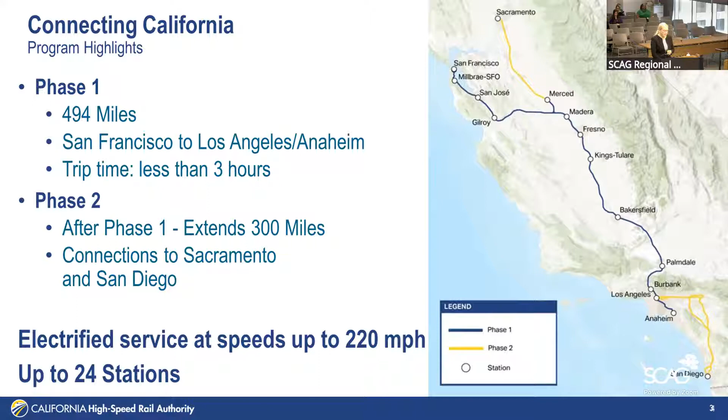I'll jump ahead of some of the questions. If you hear we haven't laid track, that is true, because that's the last thing you lay — when you have your entire guideway, you purchase the track and lay it all in at once. We're doing advanced design to connect Bakersfield with Merced.

That's the 171 miles that we feel will be our initial operating segment. We've environmentally cleared San Francisco to Los Angeles — 463 miles has been environmentally cleared — and we're advancing what we refer to as the bookends.

Proposition 1A set aside some funds for Northern California, where we've worked with Caltrain to electrify their corridor. They put it in place and saw a substantial increase in ridership there. In Southern California, I don't think I have a slide on this, but we invested with Metro $70 million in Rosecrans Marquardt in Santa Fe Springs, which I believe is substantially complete. It's open and operating, so we're proud to partner with Metro on that, as well as on Union Station.

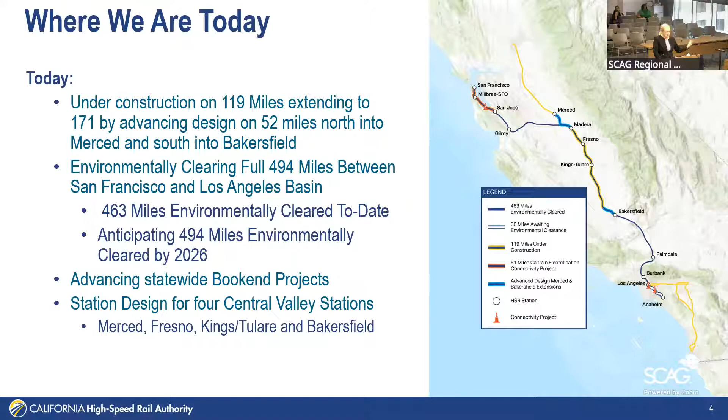We are working with Metro now on improvements on Union Station to make that an overpass there. We're designing stations in the Central Valley in phases, to be installed in phases, so that as our ridership grows, we will grow with it at our station areas. We're under new leadership, under CEO Ian Choudri.

He's bringing more of the private sector thought process into the planning that we're doing. So he set out some goals to build smarter, faster, and more economical, in more phases than maybe what we had thought we would do initially in the Central Valley. Basically, we're trying to make our dollars go further and provide for more riders. It may not initially be the high speeds, but it allows us to phase in that service and provide more service to everyone by taking a different approach.

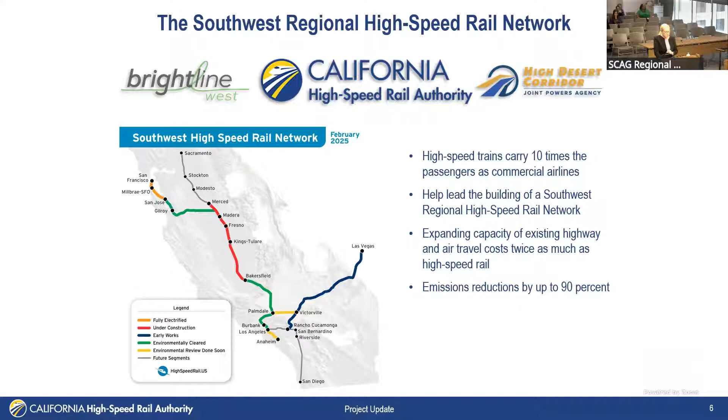We partner with Brightline West, who you're going to hear from also, and the High Desert Corridor. You can see on this map how interconnected we will all be. This will be a Southwest regional high-speed rail network connecting San Francisco, and ultimately our vision is Las Vegas and Southern California.

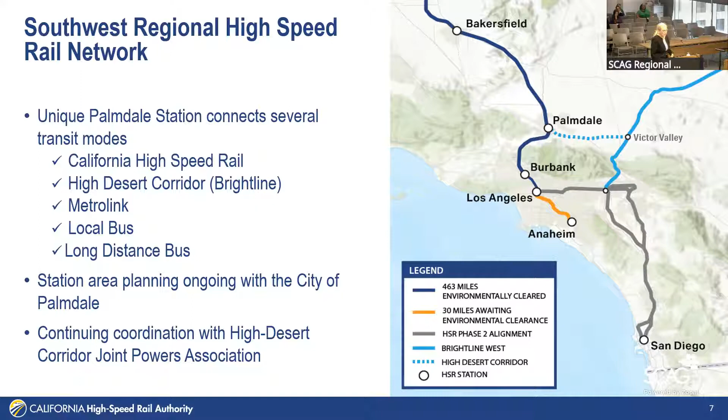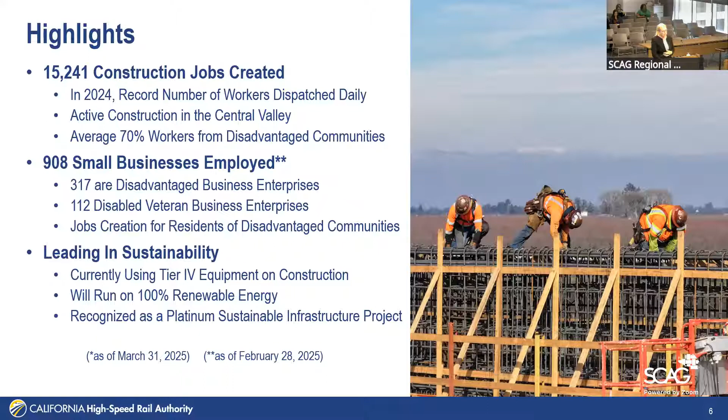Since we started work, we've created over 15,000 construction jobs. We have a very aggressive small business engagement program, so we're always looking for ways to engage more with small businesses. In fact, most of our employees come from the communities in the Central Valley. We're an important provider of jobs in that area for both small businesses and employees. And we're leading on sustainability, trying to make our operation as sustainable as possible, with a commitment to use all renewable electric energy for our operations.

And that was, if you saw any news yesterday, you probably saw it. Secretary Duffy is taking a look at this grant. We disagree with the fact that he says we're not done yet. And as I said, of course, we haven't laid rail because we haven't finished all the guideways. I'm just going to address that question now because I know somebody's going to have it. But we do have 30 days to respond, and we disagree with their assessment of the progress we've made.

We started in the Central Valley. We're doing what we can with the funding that was initially allocated, and we're trying to figure out ways to really stretch that dollar and make our previous investment more productive. So we will be working with the administration, but we disagree with what they have to say. We have a project update report coming out in July, which will provide additional information on schedule and approach.

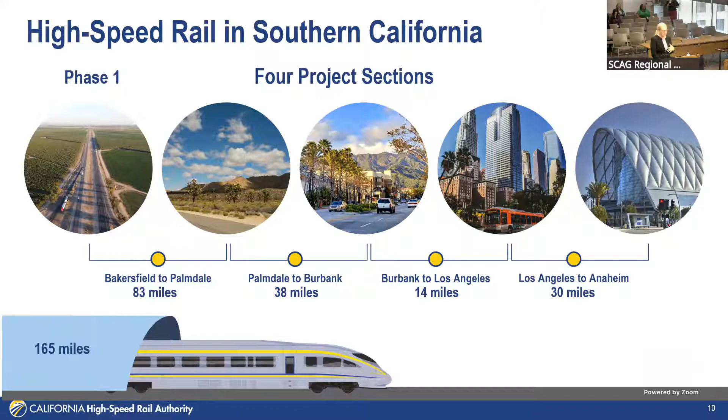Moving more to Southern California, where I oversee what's happening. We're divided for environmental work into four project sections: Bakersfield to Los Angeles, environmentally complete, and then we're deep diving today into Los Angeles to Anaheim. Just a highlight: Bakersfield to Palmdale was environmentally cleared in 2022, and Palmdale to Burbank was environmentally cleared in 2024. We are looking for funding for that Bakersfield to Palmdale work so that we can connect into Palmdale, like I mentioned, into Brightline.

And then we've adopted a preferred alternative for our approach to Los Angeles to Anaheim. So I'm going to spend the rest of the time on Los Angeles to Anaheim, which is probably relevant to many of you. We have a preferred alternative, which we refer to as our shared passenger track alternative.

It's just south, for those of you who know BNSF's Hobart Yard, a little bit south of that yard, and a lot of that property we were planning to acquire anyway. It gives us kind of a double-ended operation.

We do not plan to have a high-speed rail stop or station in this corridor, at least not in our preferred alternative. We took a look at this and thought an additional platform would be a redundant cost and expense, given that Metrolink and Amtrak's LOSSAN all serve the same corridor. If one of our passengers really needs to connect with us, they can take a train to Union Station or take a train to ARTIC.

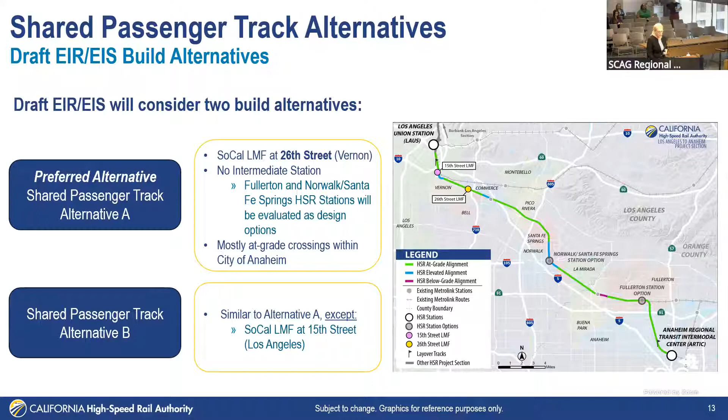We call it the shared passenger track alternative because this is a BNSF corridor. It's currently a 3-main track corridor, used by Metrolink, LOSSAN, and other passenger carriers currently. We're proposing to add one main track and allow this to be kind of a 2+2 operation.

As you can see in the graphic, two tracks will be dedicated freight and two tracks predominantly passenger. But from time to time, our modeling shows it's necessary to have freight potentially run under that catenary, and our modeling shows that we can allow this.

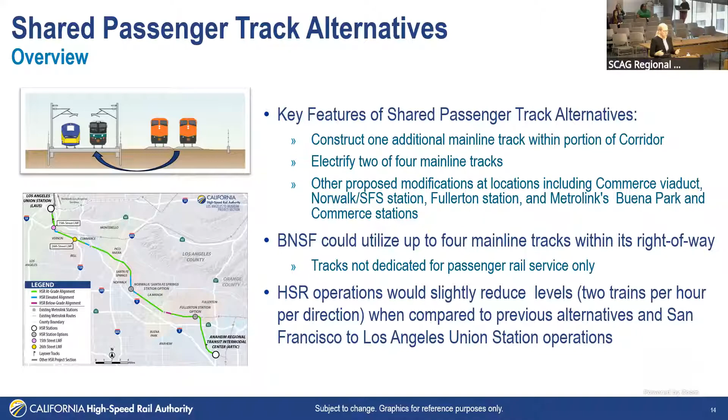What this system does is allow for directional traffic for rail operations. So all the freight trains are going the same direction on this track, the same direction on that track. It really opens up a more efficient corridor, allowing for our 2 trains per hour per direction, but also some potential growth in the future for the other passenger carriers that serve that corridor.

Real quick, I'll run through these. I've got a graphic that shows some of the improvements we're making throughout the corridor, and we're going to deep dive into the Commerce area, where we will have a flyover.

Currently, when BNSF needs to go into their facility in Commerce, shown here in green, the freight tracks, shown in orange, actually have to cross over the passenger tracks. What we want to do is a flyover or some sort of viaduct, whatever you want to call the bridge, so that BNSF can serve underneath their yard without that conflict. That's one way we will be creating additional capacity in the corridor.

We'll have to relocate that Commerce station that's currently there, just about a mile further to the east.

Back to the main corridor, taking a dive into the central part of the corridor. You can see BNSF has some facilities on the south side in green. So we're going to move BNSF back to the south side of that corridor with a flyover or viaduct in the Norwalk Santa Fe Springs area.

And then down on the bottom right is the Fullerton Airport. So in order to take our catenary out of the air pathway, we will be down in a trench going back under the BNSF tracks within that corridor. And as we go into the Fullerton area, passenger trains will be on the south side of the corridor so that they can serve into ARTIC and further south without that conflict with freight rail.

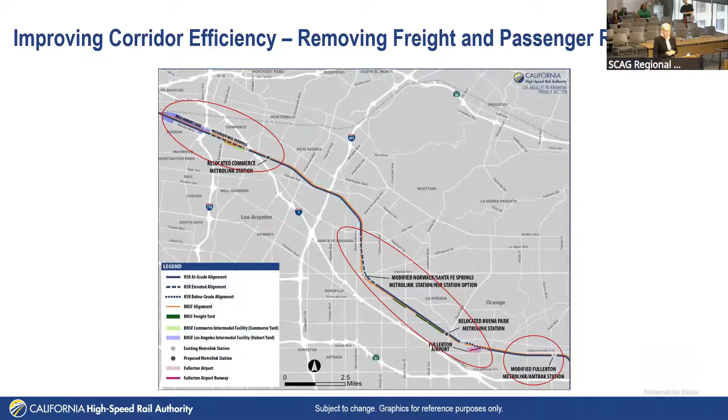I mentioned a light maintenance facility. It's just like the word sounds. It's light maintenance - we're not going to do heavy maintenance at this particular location, but it will be a place where we can inspect our equipment and do minor service and restocking of the equipment at that facility.

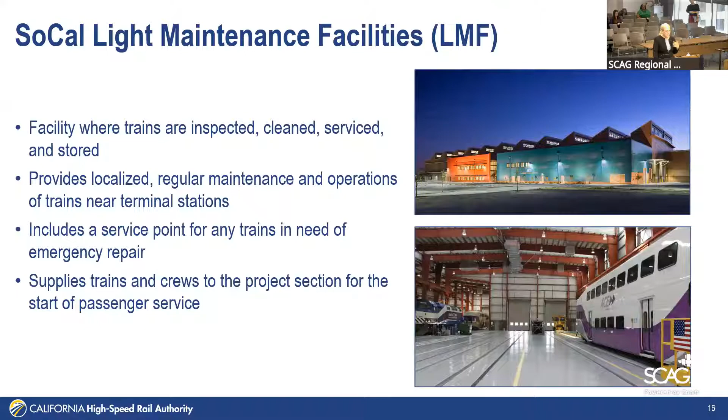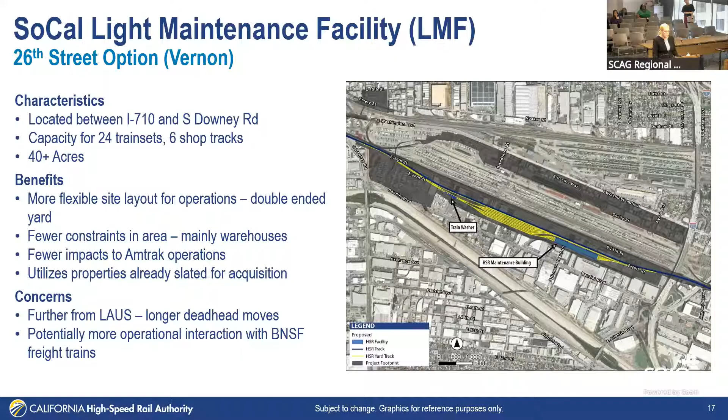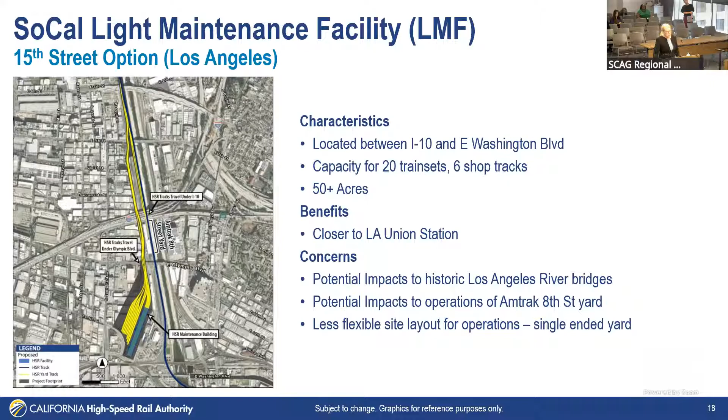So this is the location that we would put the light maintenance facility. Light maintenance facility option at 15th Street - you can see these are dead end tracks, which operationally is harder for trains to do. So it is not our preferred alternative, but we wanted to take a look at options.

Grade separations: the corridor between Union Station and Fullerton will be for us grade separated, which means that traffic going across, cars don't have to stop for our trains.

We will be grade separating that corridor, the one with the 4 main tracks. When we turn south to go toward ARTIC, it's a 2-track system. There aren't very many freight trains on that.

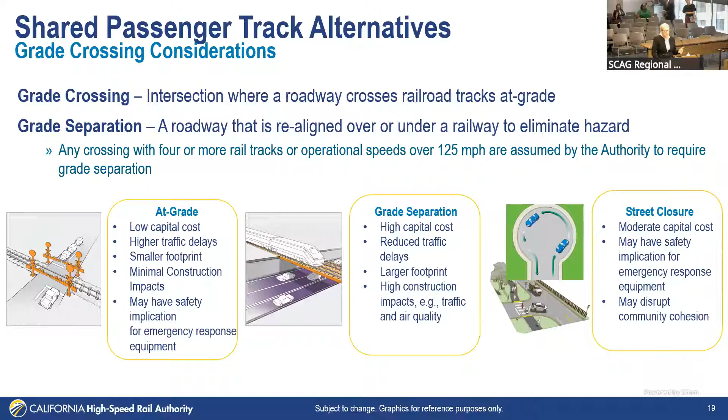So we're planning to leave that system pretty much as it is. That would be in the city of Anaheim. We've been working with Anaheim, but we felt that grade separating was going to create more disruption than was needed for our 2 trains per hour per direction. They'll be pretty quick trains, not long freight trains. So we're leaving that pretty much as is, with the exception of a couple crossings that we needed for our infrastructure.

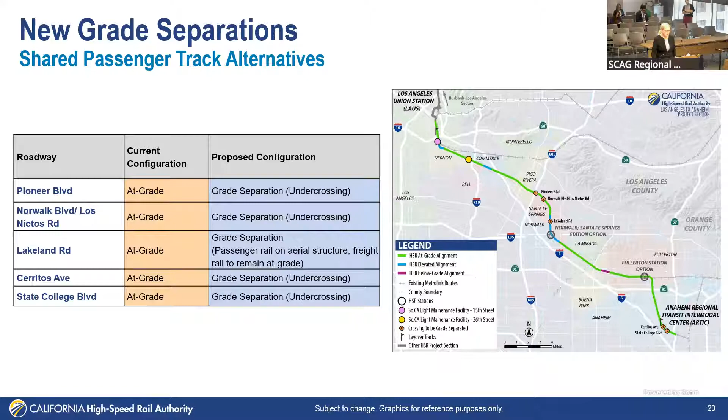As we get toward ARTIC, the Anaheim Transit Center down here at the bottom, we're going to put some layover tracks so that we can get our trains out of the way of everybody else. That will necessitate some improvements of grade separations there. But for the most part, we don't have plans to grade separate that corridor.

Where are we? Major milestones for LA to Anaheim. This is the last section that we have environmental to do. Our draft is coming out later this year. We're currently trending toward late October, possibly early November, but we will get it out one way or another this year. We'll be looking for folks to comment on that, and then we'll hopefully have our final environmental document out sometime spring, I would say mid 2026, and then to our board for a final determination later that year. That's it for me, and I wanted to leave time for questions, so I apologize for talking fast.

All right, Supervisor Spiegel had a hand up.

All right, I have a quick video, I think it will play.

Introducing Brightline West, America's first true high-speed train that's ushering in a new era of modern travel. From the lights of Las Vegas to the beaches of Southern California, Brightline West will connect two of the world's most iconic destinations in just 2 hours.

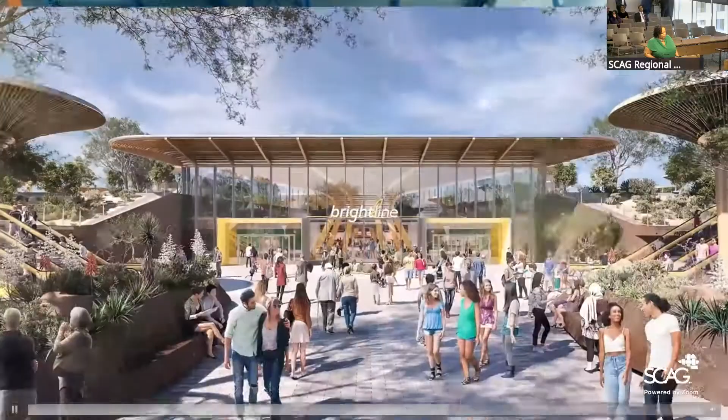By soaring at 200 miles per hour, Brightline's zero-emission, all-electric trains will be the greenest form of transportation in the world, and will be made right here in the USA with American labor. From beautiful stations with bright lounges and premium amenities, to an exceptional onboard experience with all the extras, Brightline West will offer a convenient and comfortable way to work, relax, and play.

Welcome to the ride reimagined. Welcome to Brightline West.

Introducing Brightline. Everybody says they won't be before you long, and then they do the opposite. But our goal at our company is to connect city pairs that are too long to drive and too short to fly. I grew up in Las Vegas, so I've gone back and forth to California my whole life. My mother lives in Orange County, and she wanted me to squeeze in a hug at the airport this morning. And I was like, Mom, there is no time. Got to get on the highway.

So our first passenger system, I got to ride this. I've ridden it several times, but in Florida, we started out with stations in Miami, Fort Lauderdale, and West Palm Beach. And then we did inline stations, which are smaller stations, in Aventura and Boca Raton. Those are similar to what we're going to be doing in Hesperia and Apple Valley. Then our flagship station launched in 2023 in Orlando, and we're actually in the Orlando airport, in Terminal C. So if you come in, you can connect there.

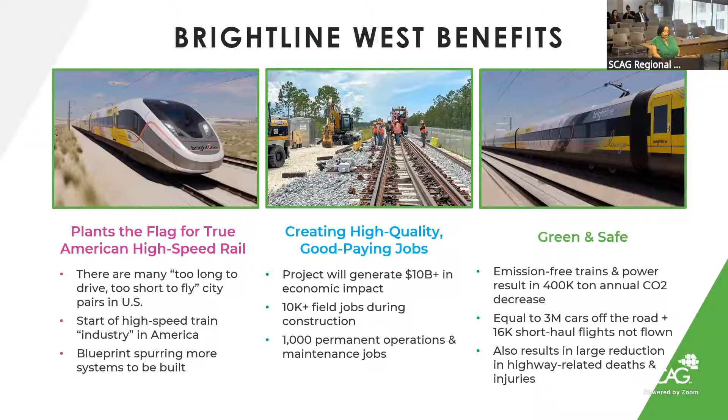So the track is mostly single track. There's about 37 miles of double track, which allows trains to pass each other. We will be going every hour on the hour, but we do have 4 areas, well 5, if you look at when we're coming out on Rancho, that will have double track, but it is mostly single track. And I learned this - I tell people, you know, transportation was not my background, but the way the trains are developed, the conductor would just go from the front of the train to the back of the train and keep going, so they don't turn around or anything.

Our contractor summary - so we're in the process of finalizing all of our contracts right now. Our office, every conference room is full every day as they're negotiating those terms, and you'll see things happening in the next few weeks. The contract with Siemens was signed in spring of 2024. Siemens, we also have a Buy America project, but we do have a Buy America waiver for the first set of trains, the first 2. They will be built in Germany. Our engineers, our union leaders have been going over there to learn how to build the train.

When they come back, we have a facility, Siemens has a facility in Horseheads, New York, upstate New York, which is very familiar since Siemens had a factory there previously. That's where our trains will be built. The four parts for the contractors are civil infrastructure, track and system, rolling stock which is Siemens, and then our other project costs.

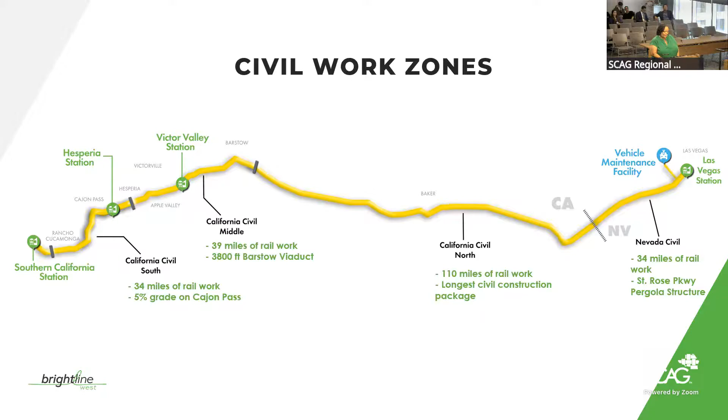The Las Vegas station, we actually own 110 acres where we're putting the station. The station will only take about 20 acres, so transit-oriented development will go on the other 90 acres.

In Miami, we did something very similar. When we came in, we have where our station is, but we built up the area around. Some of it we built ourselves, some we sold. We brought a grocery store to the area. They hadn't had one in over 40 years, but really worked with the local community to see what was needed. And I don't have the slide on this one, but if you see the footprint of where they were at before we came and where they're at now, it really spurred development for the area.

Allegiant Stadium, where the Las Vegas Raiders play, forgive us. That is the A's, the last team. We're not taking any more teams from California, but also the A's Stadium. I'm sorry, I know we're done. We're done. The basketball team's gonna be an all new team, we're told.

But just showing that people are going to be able to connect, and beyond just being able to connect, we're creating opportunities. We're working with casinos where you can book, and we're working with Uber and Lyft. So from your phone, you'll be able to book your ticket, your Uber, and your connection to your hotel, all through one ticket, so you're not out there standing around. I know if you've been at the airport, I purposely did not fly into LAX just because of that Uber situation. I'm like, let me go somewhere else where I can move a little quicker. But we want to make sure it's an experience, and it helps your experience if you're not stressed out trying to navigate and maneuver. So the casinos are excited. The conferences that are coming to town, everybody's looking forward to how we can make that seamless.

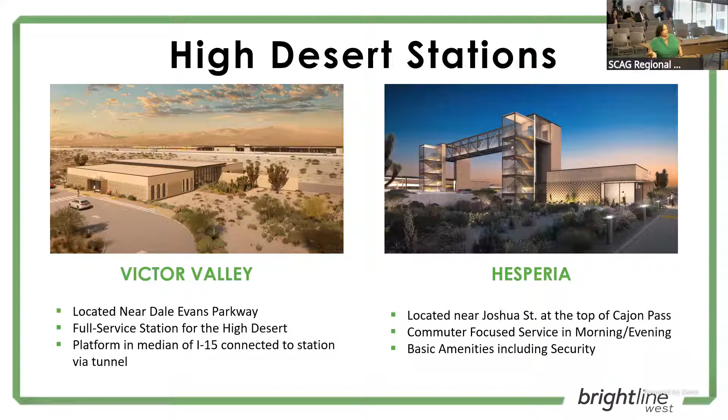The Southern California station, our Rancho Cucamonga station, is the multimodal hub. Our station will be built directly over Metrolink, so the idea is similar to when you're on the East Coast and you just take the escalator down to the next level and get on the train. That's what you'll have with us.

You'll be able to book one ticket. We will synchronize the schedules so you don't have to wait a long time. You get there, you go down, you get on the train. Single ticket, integrated ride, and we'll be doing joint branding. Of course, we'll have the high-speed rail Brightline trains, but once you get there, we want to make sure Brightline is still represented, so we're working with them on that.

Also, the parking structure has 3,700 spaces. Each site has a lot of parking because we know people want to park and ride. So all of our stations have a lot of parking.

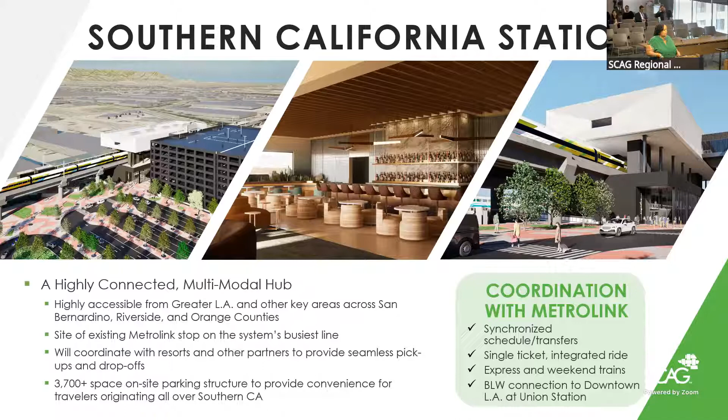On American manufacturing, to date we're already working with 50 suppliers in 28 states across the United States, to include Puerto Rico. We're taking Buy America seriously. If you go to our webpage at brightlinewest.com and scroll down, it says interested subcontractor or vendor. Click on that and people can complete the link. When they do, every Friday that link goes to all of our contractors, so as they're sourcing different vendors they have a list to go from. I've also asked them, when they're doing events, to reach out to that list and make sure those people are aware of what's happening so they can attend and get more information on how they can participate.

As it relates to traffic and construction as we get started, we're working with both Caltrans and NDOT in Nevada to tap into the systems they already use, so you can go to Twitter and see what's coming out. We're doing a robust outreach program, everything from community meetings to even door knocking in some areas, because we want people to know before. Having worked for elected officials most of my career, I know they're the ones who get hit with all the questions, and we want to remove that.

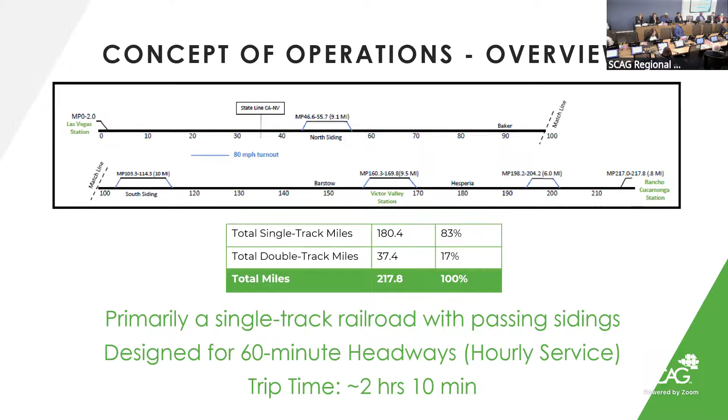Don't kid me. Thank you. No, I'm kidding.

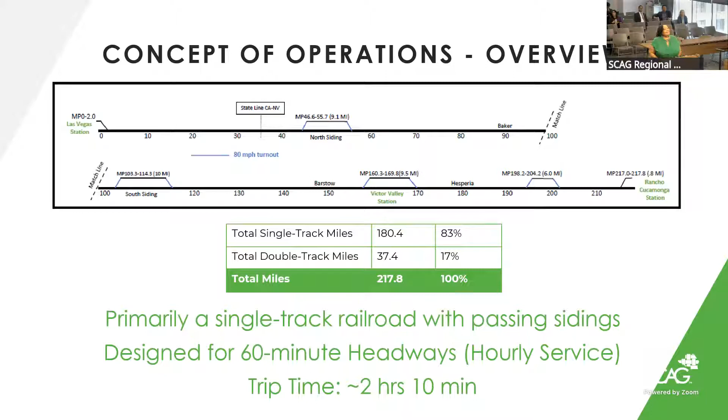Anybody besides Chairman Wood? We're good. Okay, well, thank you very much for your presentation. We're gonna... thank you, and I will get that back to you today. I'll get your information. Perfect. All right, take care.

Excuse me, we're gonna move on to item number 9, Southern California Zero Emissions Truck Infrastructure Studies, Findings, and Final Report. Jonathan Raspo will be presenting this.

Good morning, everyone. Good to see you all again. Okay. No, you got you. Yeah, I think it was just pick up on the number. Just kidding. It's actually going to be me with the Smart Cities and Mobility Program update.

Beautiful, okay, well thanks everyone. Good morning, Chair and Commission, or Chair and Committee, I'm happy to be here today. My name's Marissa Laderack, and I will be talking a little bit about our Smart Cities and Mobility Innovations Program, which just wrapped up, and our upcoming Sustainable Communities Program as well.

So to recap, provide a little bit of an update on where we are and how we've gotten here. A lot of these things on the slide are going to look familiar to you all. These are a lot of the great efforts that we've brought to the committee in the past couple fiscal years, including our clean transportation technology policy, our clean technology compendium, our goods movement partnerships such as the zero emission truck infrastructure study, which you'll hear about shortly, our work for the Clean Cities Coalition, and the pilot programs and technology demonstrations I'll be talking about today, one of which was our Sustainable Communities Program, Smart Cities and Mobility Innovations Program.

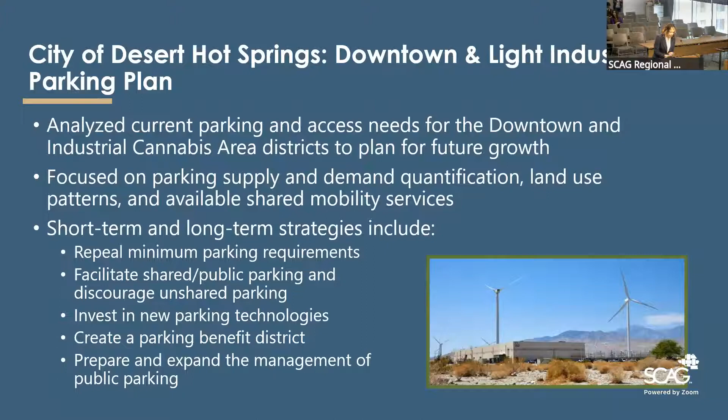As far as Garden Grove, we were looking at curb data here, but it was really a parking type of project. So we're looking at curb and parking here. The project explored parking management and mapping of the curb in 6 different study areas, and these all either focused on areas where there was a lot of overutilization of parking or underutilization.

Local residents have been experiencing parking challenges in some neighborhoods, and seeing that some street segments did have a parking utilization rate that exceeded 85%, it was pretty clear that interventions and strategies would be necessary to alleviate these challenges.

The city worked really closely with residents and completed extensive engagement to ensure that the recommended menu of planning and policy options are supported by the community. These include things like continuing efforts to increase enforcement of the existing parking regulations, looking at establishing a residential parking permit (RPP) district, facilitating shared parking agreements, establishing transportation demand management (TDM) requirements for new residential developments, and potentially implementing a comprehensive traffic reduction and transportation improvement fee.

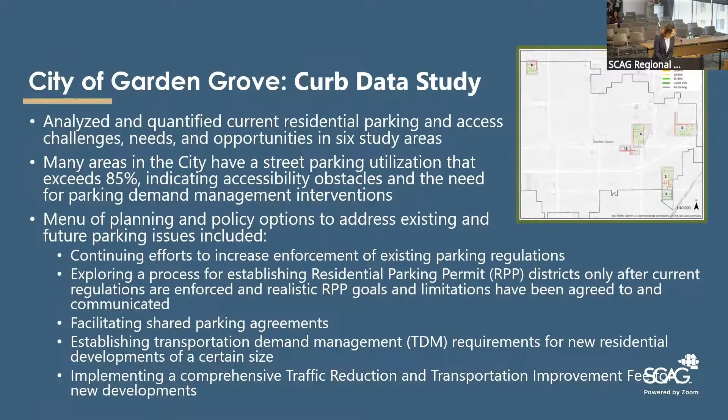And then lastly, for the city of Laguna Woods, we were looking at identifying a path towards connected and autonomous vehicle, or CAV, readiness. This helped us envision a potential operation of an AV pilot program within the city. This approach involves 3 phases with a focus on scalability for the SCAG region.

The first phase was designed to provide independent value regardless of other city-approved AV pilot services. So we're really looking at improved infrastructure and mobility and things that can help interface with AV operations in the long run. This included concepts like mobility hubs, roadway alterations, mobility on demand platforms, enhanced network connectivity, and signal controllers and detectors.

The second phase would be launching a small-scale AV service along 2 main arterial roadways in the city. This includes a performance measurement framework and other elements in the plan that can help measure the program's effectiveness across several variables, including financial success, sustainability, safety, ridership, and more. If successful and with available funding, they would be moving on to a 3rd phase to expand.

We do have some other upcoming Smart Cities program activities. Some of you may be aware, but we are planning to release a Smart City Strategic Plan RFP in the coming few months. We're really looking to bring together all this great work we've been doing to comprehensively help us outline and advance our efforts moving forward for what smart technology can be, how we integrate that, and what other approaches we can be taking.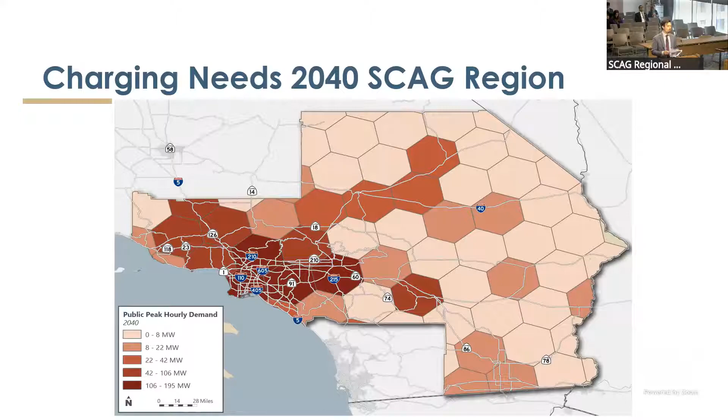It's important to understand that about 70% of the public demand that needs to be supported is for long haul operators and some regional trucks that don't have a depot to charge at, so they'll be most dependent on public sites. Private depots are going to supply a lot of the private fleets who go back and recharge at night, or have depot or maintenance sites along their routes, as well as drayage operators. They've got more opportunities to charge with shorter range requirements than the long haul sector, which is really the biggest challenge here.

Then it roughly doubles to 13.1 gigawatts. This is the biggest growth period we see, as a lot of fleets are required to come online. This does take into account things like ACF and ACT, which when we did the modeling had not had their waivers withdrawn, or weren't in the legislative or legal gray area they're in now. Then out in 2040, we see a total of 21.2 gigawatts for all that charging, with about 12 gigawatts needed for public sites.

Again, a lot of that energy demand out in 2040 and beyond, it's those long haul trucks. They need to fully deplete their battery and then fully charge at that site again and then go pretty much as far as they can. We do take into account some things like range extension and technology improvements, but we were pretty conservative there. I think less than 5%, sort of 2030, 2035, 2040, where battery capacity is increasing, charging speeds are increasing, and range is extending. We wanted to be not overly optimistic about the technology improving, just because all of the fleets that are buying this equipment, they don't go out and buy new trucks every year. In some cases, they're getting 10 or 15 or 20 years out of some of these trucks. Some of it goes into the secondary market, but it doesn't happen overnight.

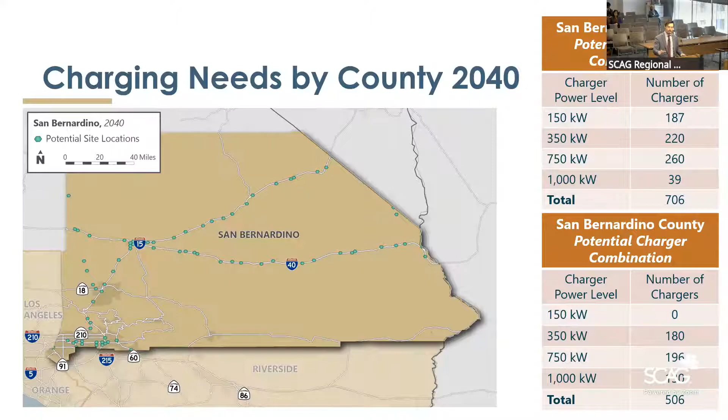We're seeing these partnerships between carriers, shippers, warehouse operators, and package delivery companies. This is a good sign that the industry is moving in this direction. They're not abandoning their plans or letting things sit idle. They really want to see this succeed. We've had those conversations consistently throughout this project, where we always ask: what's going on with you with zero emission trucks? Where are you? What's working, what isn't? And this is the direction they're heading in.

So that's the energy simulation, that was kind of the biggest lift in the project. The other piece we put together that's sparked a lot of interest among our partners is this site prioritization tool we developed. Let me talk quickly about what this tool isn't and what it is.

It is not here to tell people who use it that you need to develop this site in this year with this many chargers, because this is where the trucks are going to charge. That's a little bit cart before the horse. It's really to help screen down in different jurisdictions where the best areas or locations are at a parcel level, where you'd want to consider in-depth engineering analysis, looking at your operation and what fits your needs as a fleet operator, or in some cases as a municipal site that would operate for public truck charging or municipal fleets. Cities have a lot of vehicles of their own that are transitioning to zero emission.

Higher scoring sites, this is like 5 to 10 points, tend to be where trucks already are, where there's larger amounts of power, along major industrial and commercial distribution centers, along key freight corridors. A lot of existing truck parking sites actually scored very low because there was either insufficient grid capacity or they were located within disadvantaged communities.

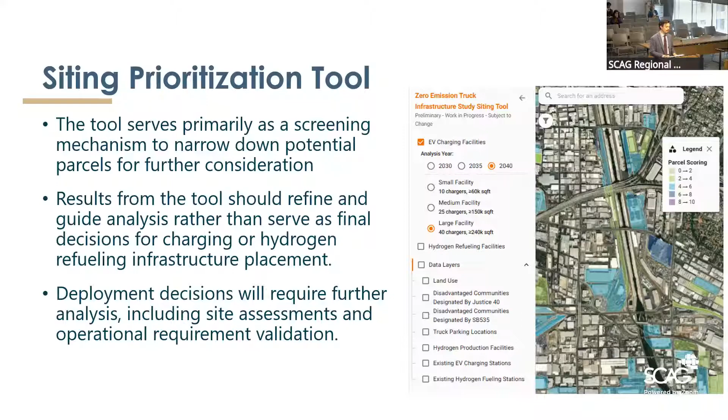We have ways to tweak the criteria if there are different goals based on who's using this. But the baseline set of criteria developed by our technical advisory committee, which included public agencies, industry, disadvantaged communities, and site operators, settled on these requirements. It deprioritized sites within disadvantaged communities to limit the effects of truck traffic and safety impacts they were concerned about. Actually, what it does is prioritize sites adjacent to disadvantaged communities, so there are still some benefits with zero emission trucks coming in, but it doesn't necessarily go into those communities and create negative impacts around truck traffic directly.

Quick recap: we had 5 main groups of siting criteria for EV charging and hydrogen fueling infrastructure - utilization of the actual site, land characteristics, equity considerations, grid capacity, and environmental considerations, things like truck trip generation at that specific parcel, relation to disadvantaged communities, the price of land, the amount of truck parking, or distributed energy integration like solar panels, battery backup systems, or hydrogen fuel cells. I'm not going to show you the list of 17 plus screening criteria, we don't have time to go over all of that, but it's all in the report.

We analyzed 5 million parcels in the SCAG region. Only about 10%, a little less than, so 460,000 met the criteria. This was based on the TAC input on what their goals were for this tool, but these criteria are adjustable - if we just want to focus on 1 or 2 items for specific goals, that's possible. So 300,000 of those 460,000 met both land use and the space needed. There's no point developing a truck charging site where you can only fit 1 or 2 trucks - you want to be able to charge 5, 10, 20, 50, 100 in some cases. So we had some size constraints we incorporated as well.

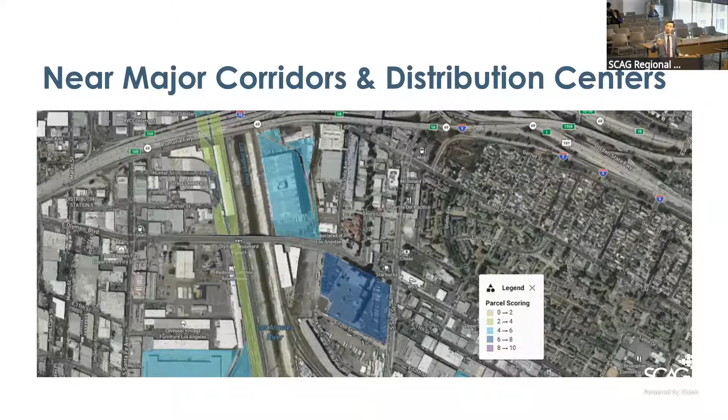I want to show three quick examples out of the tool to look at how we're assessing different areas within the region. This is just south of downtown LA, near some rail infrastructure, some warehousing. There's a USPS facility there, and it's adjacent to rail yards, intermodal facilities, a lot of industrial warehousing. This is kind of like the prime site for early deployment. There's a lot of power here, there's a lot of demand, and the infrastructure would serve a lot of uses in close proximity, or even a single location that just has a lot of demand already.

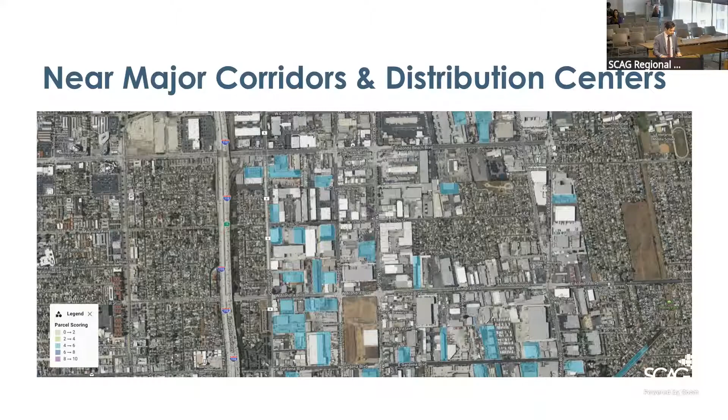This is another area in Rancho Dominguez off the 110, a little bit further south, kind of in the Gateway COG area. This is more of a scattered site example. You couldn't install really large facilities here, but if every location on this map had 2 to maybe 10 chargers at most, that's kind of what they could support. You could serve a lot of demand in this region. There's a lot of activity serving local goods movement consumption, as well as regional, statewide, and even national. So this is a pretty busy area. They serve a lot of different businesses of a lot of different sizes. And so scattered site works here, and the barrier to entry is much lower.

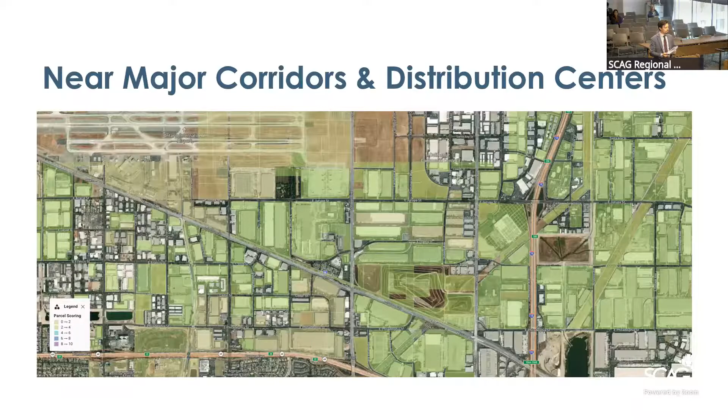So again, low scores don't necessarily mean you don't need infrastructure there. It just doesn't meet the initial criteria that our project developed. So that's why we need to work with those local jurisdictions.

The last thing that's really tricky about this is it's a really new industry. This is a really new type of construction for a lot of the operators, not something they typically build. So we actually get to learn from them learning about the site development, permitting, and construction process. In a lot of cases, they made a lot of the mistakes early on. They didn't know how to engage with utilities or ask the right questions to develop their site.

They built too much capacity, or just couldn't get the capacity they needed from the grid operator. So a lot of them actually encountered delays that were just related to normal construction, right? Another contractor was busy, there were delays in deliveries. Kind of like any public works project, there can sometimes be start and stop based on the type of project. And so they're coordinating multiple contractors out of different industries, which cascades through the timeline, especially if there's delays.

Usually it wasn't on permitting, but the actual procurement process. They're buying equipment they've never had to buy before, not just the electric trucks, but meters, transformers, laying wiring into the ground and pouring concrete. So this is a new area for them.

The biggest constraint, I'd say again, is getting that power to the site. The way truck fleets operate, they plan maybe one to two years into the future at most for their equipment and vendor needs. Public utilities plan on a five to ten year scale. It takes them longer to deliver that, and they require a lot of upfront investment.

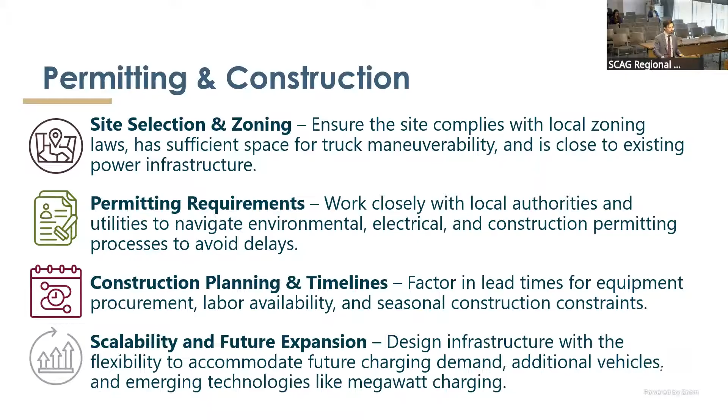The last piece I want to talk about is that this is all happening in a shifting policy environment, and we need to be cognizant of that. A lot of the analysis was done with ACT, ACF, and current incentives in place. California's withdrawn their ACF waiver from the EPA rulemaking process. The Senate is trying to roll back ACT and other California requirements around clean trucks, and pull back incentive money.

The state is still moving ahead with its own incentive programs. They're figuring out how to navigate the current policy and political environment, and they haven't rolled out and shared all of their plans yet, but we're in close contact with them so we're aware of what's coming and can advise all of our regional partners.

Interestingly, in a lot of our conversations with fleets, OEMs, and warehousing operators, they understand that truck manufacturing is really going in this direction no matter what. Truck OEMs are global companies. They want to develop a global product, manufacture it locally, but they don't want to have ten different models and ten different powertrains for ten different countries throughout the world. So the rest of the world is moving towards zero emission trucks. The OEMs see that. They still support their legacy diesel models, and see opportunities for clean diesel in the future, but they know in the medium and long term, it's going to be zero emission trucks.

One of the examples they gave was manual transmissions. In the 60s and 70s, truckers wouldn't drive a truck unless it was a manual transmission. They were like, no way am I going to drive an automatic. We talked to Mack a couple days ago. They manufacture trucks globally and had a demo project where they had to go out and get a truck to practice on a manual transmission, but they couldn't find one in their demo fleet or any fleets they'd sold to other operators.